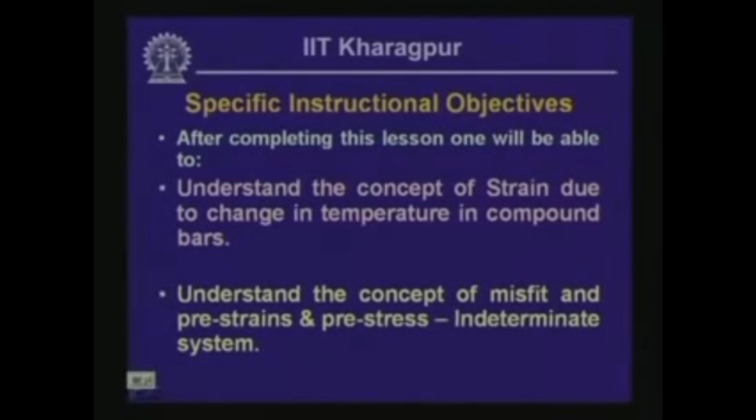We will also look into certain aspects of misfit or lack of fit. Once this lesson is completed, it is expected that one should be able to understand the concept of strain due to change in temperature in compound bars, and also the concept of misfit, occasionally called lack of fit, and pre-strains and thereby pre-stresses, which are basically indeterminate systems, and we will look into these aspects.

The scope of this lesson includes recapitulation of the previous lesson. As we have seen earlier, we generally discuss the questions posed last time, and through that we recapitulate the aspects discussed in the previous lesson: evaluation of strain in compound bars due to variation in temperature, the concept of misfit and pre-strain and thereby pre-stresses, and evaluation of stresses due to change in temperature in different systems and also due to pre-strain in the systems.

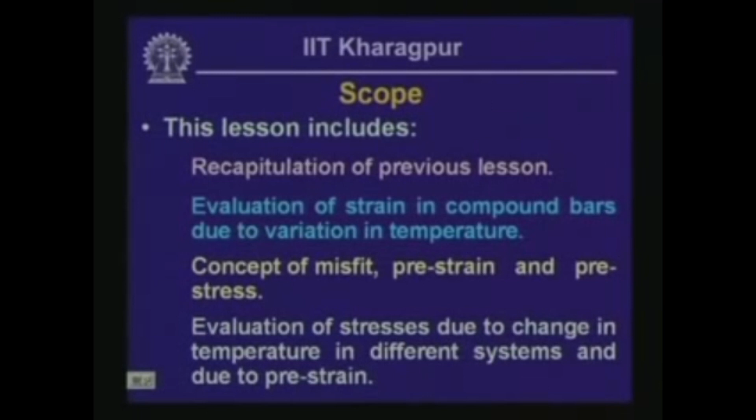Let us look into the answers of the questions posed last time. The first question was: what are the steps for the evaluation of unknown forces for indeterminate systems? If you remember, last time we had differentiated between determinate and indeterminate systems, and we had categorized the steps necessary for evaluating the unknown forces for indeterminate systems.

Let us look into the steps necessary. Number 1 is the equilibrium equation or equilibrium conditions, which can be written down if we draw the free body diagram of the system given. As we have seen when solving several problems, we take the free body of the whole system, and from the free body diagram we can write the equations of equilibrium: summation of horizontal forces equals 0, summation of vertical forces equals 0, and the moment with respect to a point equals 0, giving the equilibrium criteria.

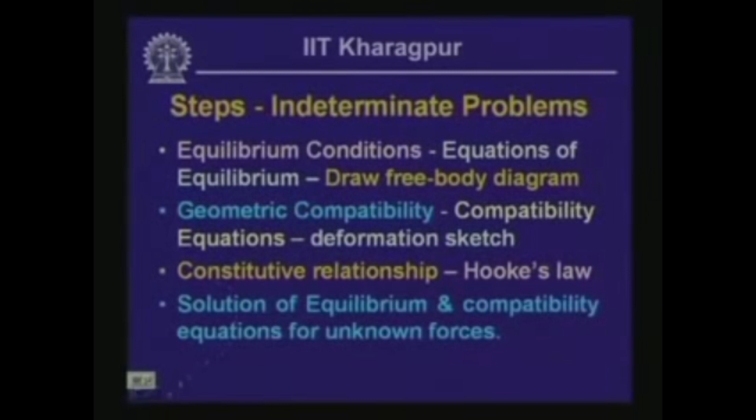So, to evaluate the value of the thermal stress, let us look into the expression which we had derived for the strain. Strain due to variation in temperature, delta T, the final temperature minus the initial temperature, is given as epsilon T equals alpha times delta T.

Now, if the deformation due to temperature is written as delta T, this equals epsilon T times the length of the member L, and epsilon T equals alpha times delta T. So this is alpha times delta T times L. This is the deformation of the member.

Now, when the body is allowed to move freely, it undergoes expansion due to rise in temperature, and we call that expansion delta T. Now, if we do not allow this expansion to happen, we are imposing a restriction, and thereby we are imposing some force into it which will bring back this deformation to its original position. Because of that, this deformation delta T should equal the deformation generated because of the applied force, which equals P times L divided by AE.

So, PL by AE equals alpha times delta T times L. Now, the parameter P by A, force divided by cross sectional area, we can write as stress. So, stress sigma equals E times alpha times delta T times L divided by L, and this L gets cancelled out. So, the stress equals E times alpha times delta T.

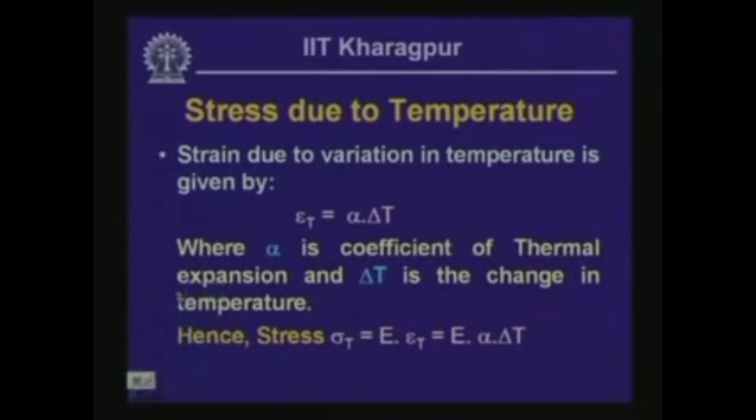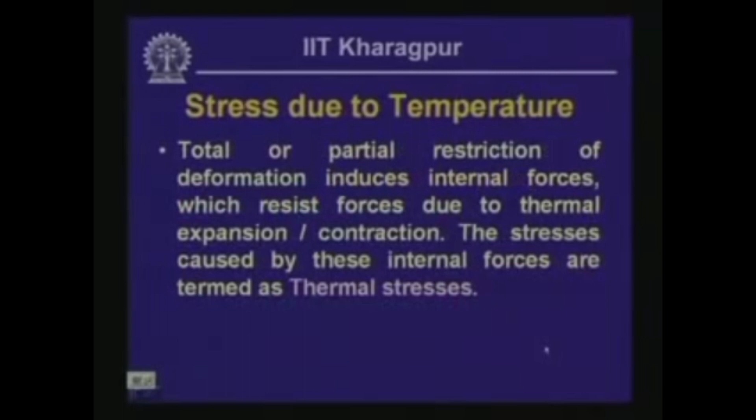Let us look into the last question which we had posed: is the evaluation of thermal stress in a stressed body statically determinate or not? From the discussions going on for the last few sessions, you should be able to answer this question, as we have said that the variation of temperature is basically not possible to solve using equations of equilibrium, and hence they are not statically determinate.

So, forces developed due to temperature changes cannot be determined from equilibrium equations only, and thereby these particular kinds of systems are statically indeterminate. Where there is a change in temperature in the system, when we evaluate the forces, or when we evaluate the thermal stresses due to change in temperature, the system is statically indeterminate, and we need the help of compatibility equations so that we can solve the stresses due to temperature change.

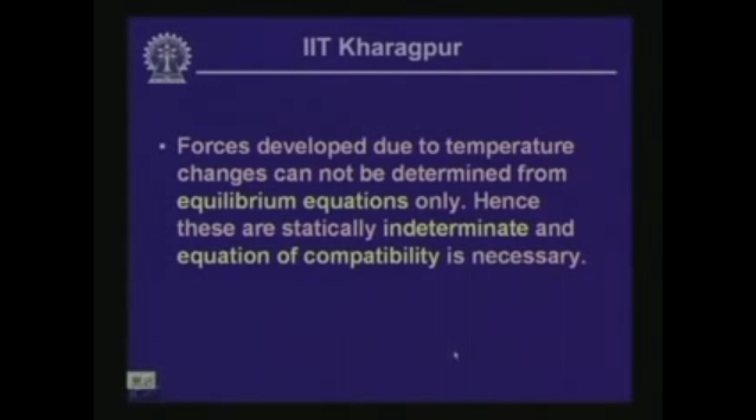Having looked into the questions, let us look into what will be the effect of change in temperature, or the effect of thermal stress in compound bars. Now, compound bars are systems made out of materials of different types, thereby their thermal expansions or contractions are of different magnitudes.

Now, if we look into a system which is quite common, it is like a bolt which is put into a sleeve, and this is the bolt head. Let us say this particular part is the outer sleeve, and this is the bolt which has a threaded part here. This is the bolt head, and this assembly has a washer plate which is provided at the end. So the whole assembly is allowed to undergo a change due to temperature.

Let us say there is a rise in temperature; the whole system undergoes a change in temperature, and let us assume that the thermal expansion for the outer sleeve is larger than the central bolt. So, if we say the coefficient of thermal expansion for the sleeve is alpha s, then alpha s is greater than the coefficient of thermal expansion for the bolt, which is alpha b.

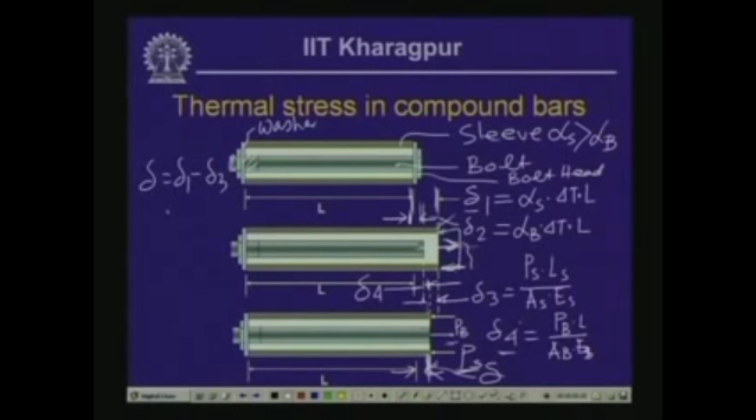From its initial position, it has expanded to delta 2. Now, to bring this to the final position of the combined system, it has to be expanded further by application of this tensile pull PB, which is delta 4. So this equals delta 2 plus delta 4. So the final deformation in the whole assembly of the compound bar equals delta. So the final deformation delta equals delta 1 minus delta 3, or delta 2 plus delta 4.

So we can now write the compatibility equation as delta 1 minus delta 3 equals delta 2 plus delta 4.

Now, in addition to this, we need to have the equation of equilibrium. For this particular system, if you look into the equation of equilibrium, there the forces which are being applied to bring back to its final form, Pb is equal to the force in the sleeve Ps. This is the equation of equilibrium number 2, and this is the equation of compatibility number 1. So we have now two equations.

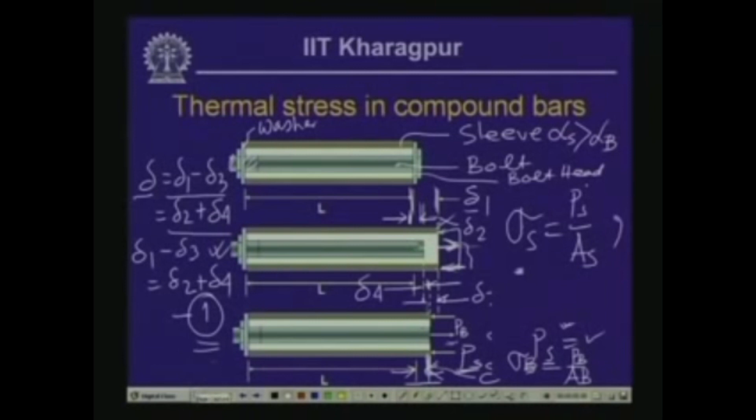Now let us look into another term which we call misfit, or another term which we call pre-strain. Many a times we get structural systems consisting of several members. It may so happen that any of the members of the whole structural assembly are not to the exact length as it should be, either longer or shorter. If that happens, when we try to assemble the whole structural system using these individual members, the length which is shorter or longer causes some problem in the assembly, and this is what is termed as misfit.

It is not fitting appropriately in the system, and that is why this term misfit comes in. Now, if the structural system is a determinate one, let us take an example. Let us say we have one bar which is pinned at this end, and this bar is connected by another bar, connected at this position. Let us assume this is AB and this is CD.

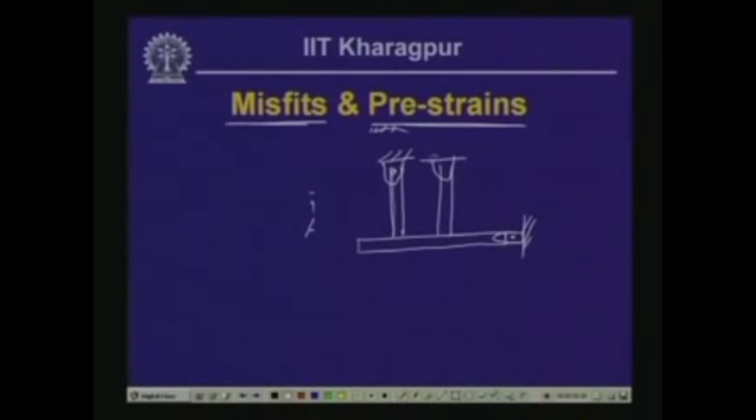Which is connected at this point, and let us say we have two bars connected at this point, and connected at this point. Now, let us say this is A, this is B, this is C, this is D, this is E, this is F. Now let us assume that the length of both bars CD and EF are L.

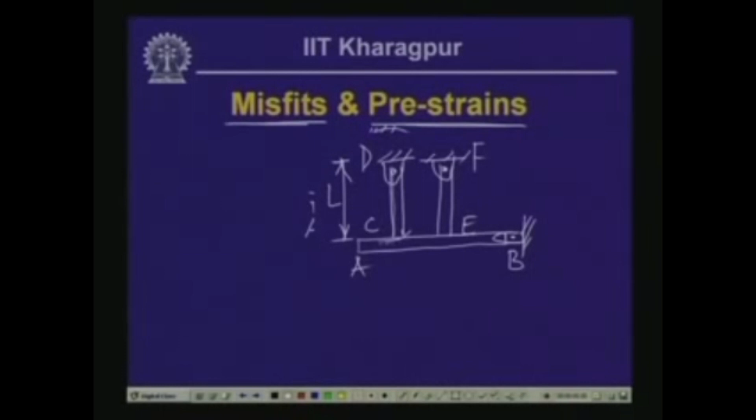Now, if one of these bars, let us say CD, is longer than the length L, then there will be a problem that we cannot fit the member CD into the whole structural assembly. As a result, if we would like to fit in that longer bar, what we need to do is stretch this whole assembly, fit in the bar CD in its position, and release this force. As a result, the whole assembly, the bar EF and bar AB, will be subjected to some amount of strain, and there will be stresses induced in the bar.

So if the system is indeterminate, and if we have the length of the member not exactly as we desire, there is a possibility that the structural system will be subjected to some amount of strain. These strains or stresses are pre-introduced in the system before the system is loaded or any loads are applied, and this is what we call pre-strains or pre-stressing. Many times we introduce this kind of pre-straining or pre-stressing intentionally to avoid some problems in certain situations, which we will look into at a later stage.

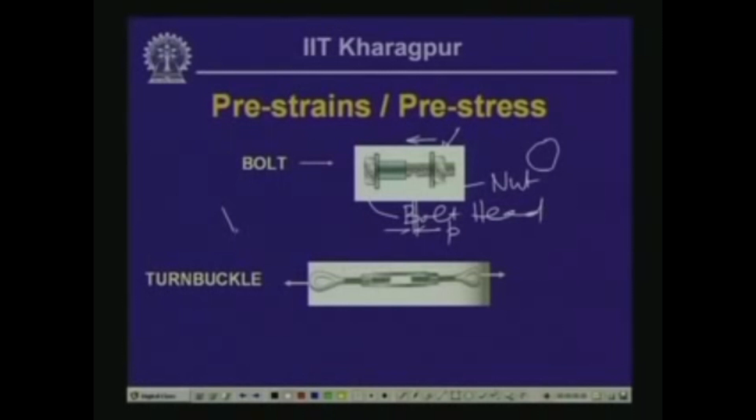Now, when this nut is rotated, if we start from one point and rotate it one complete round, the nut moves forward. This movement is over a length in the threaded part, which we commonly term as pitch. So if we look at that threaded part in this form, when the nut is rotated along the threaded part, it moves ahead, and when it moves from one point to the other by giving a complete 360-degree rotation, it moves ahead over these two peaks, which we designate as the value P, which we call pitch.

So if there are n number of turns, if we turn the nut by n, then the total movement of the nut, if we call that delta, is going to be equal to n times the pitch P.

Another system which is often used is known as the turnbuckle. In the turnbuckle, threaded parts are introduced on either side, and once this system is rotated, both threaded parts move. Once the central part of the turnbuckle is rotated, since we have threads on either side, both sides move forward or backward by one pitch. So if we have one complete turn of the turnbuckle, we have two movements, which equals 2 times P.

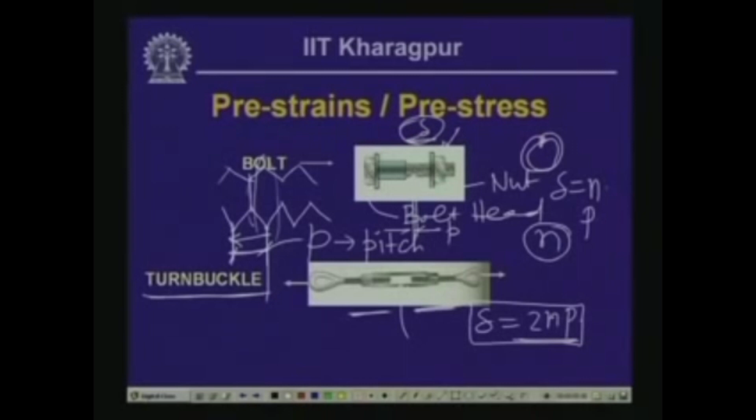Now, this misfit, or many a time, some deformation are introduced in the system by using the turnbuckle, and we introduce some amount of pre-straining or pre-stressing in the member. If we have this kind of pre-straining in the system, then the evaluation of the effect of such pre-straining, or the evaluation of the stresses, are exactly the same as that of the effect due to temperature change. So the way we have analyzed a system for thermal stresses due to change in temperature, we carry out exactly similar steps to evaluate the effect of such pre-straining system. In other words, we write down the equations of compatibility and equation of equilibrium, and then we relate the strain to the stresses through constitutive relationship, and we evaluate the unknown forces and thereby the stresses that is introduced in the assembly.

Now let us look into that. If we introduce this kind of pre-straining, then how do we get the stresses in the system? Let us say we have an assembly where we have a central shaft which is made out of copper, and we have two steel wires on two sides where two turnbuckles are introduced. So this is the turnbuckle, and this is also the turnbuckle.

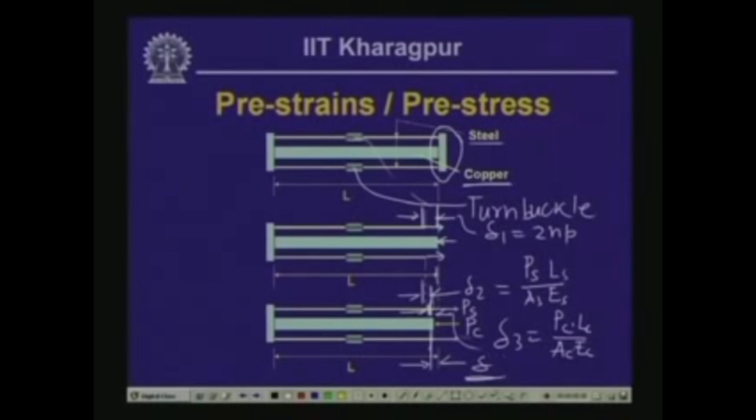Now, the compressive force which is being applied into the copper bar, if we call that as Pc, so the deformation which is from this position to this position, which we call as delta 3, this delta 3 is equals to Pc times L by Ac times Ec, or Lc and Ls, let us call it. So then the final form is, which is from original length to this particular length, which is equals to delta, and this delta is nothing but equals to, delta 3 is equals to delta 1 minus delta 2. So we can write the condition that delta 1 minus delta 2 is equals to delta 3.

So this is the compatibility criteria which is occurring because of the application of the pre-straining in the system. Also the equilibrium equations, if we look into that, we have two steel wires which are being pulled by a force Ps, and we have the central copper bar which is being compressed using the force Pc. So in equilibrium situation, Pc should be equals to twice Ps.

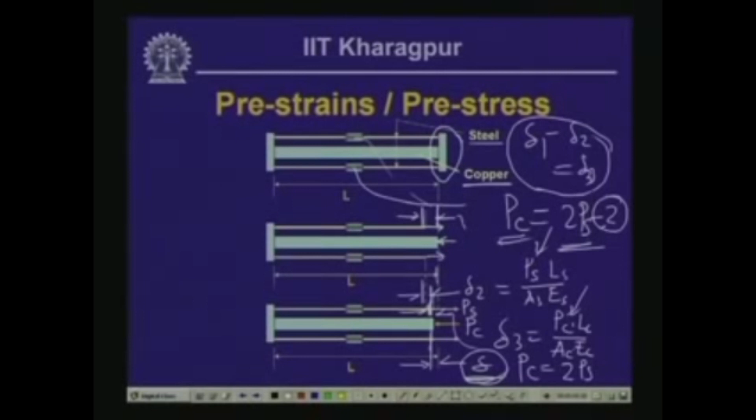So we have the equation of compatibility, which is delta 1 minus delta 2 equals to delta 3, which can be written in terms of Ps and Pc, and we have the equilibrium equation which is Pc is equals to twice Ps, which we can call it as equation of equilibrium, and these two equations in combination will give us the values of Pc and Ps. Once we know the value of Pc and Ps, we can compute the stresses in the copper bar and the steel wire, and thereby we can compute the final deformation that will be occurring in the whole assembly. So similar to the one as we have done in case of evaluation of thermal stresses, we can evaluate the stress and the deformation in an assembly where we introduce pre-straining or pre-stressing in the system.

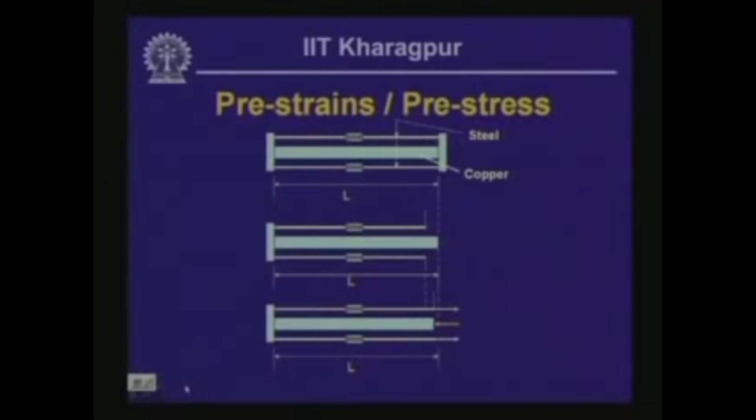Well, after looking into these aspects, let us look into some examples related to these areas. Now, in the last lesson, I had solved one problem which is like this: we have a rigid block of mass m supported by 3 rods, 2 copper rods and 1 central steel rod, and of course we had evaluated the stresses. It was asked to evaluate the largest value of m.

Which we had evaluated from the criteria that the deformation of the copper bar equals the deformation of the steel bar, that is delta C equals delta S, the final deformation in the system. And of course the criteria of equation of equilibrium, that the mass is being supported by 3 bars. So we had written the equation of equilibrium and the equation of compatibility, and the compatibility criteria comes from delta C equals delta S, since finally they will be at the same length, or it will be a level surface.

Well, we had solved that, we had evaluated the value of m. Now, subsequently, it is told that you need to determine the length of the 2 copper rods, if it is different from 160, so that the stresses in all 3 reach their allowable limits simultaneously.

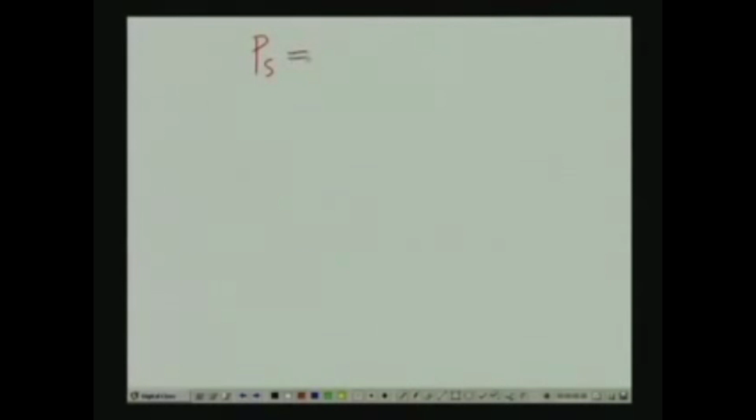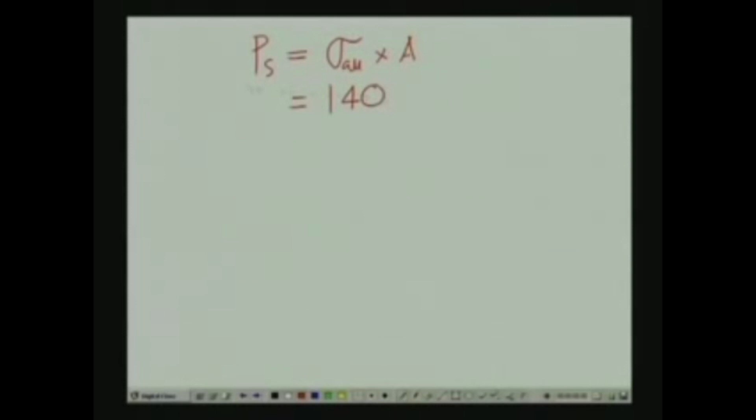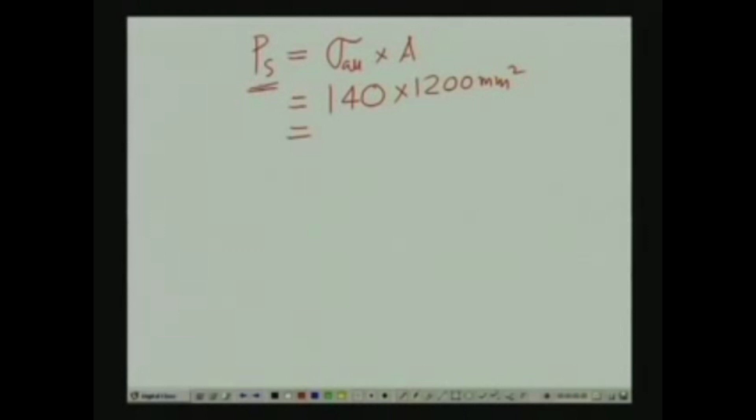If we go into the full limiting stress, then what will be the value of the forces that they can undergo? Now, the load that can be carried by the steel bar equals sigma allowable multiplied by the cross sectional area A. Since the limiting stress is 140 MPa for the steel bar and the cross sectional area is 1200 millimeter square, the maximum load carried by the steel bar equals 168 kilonewton.

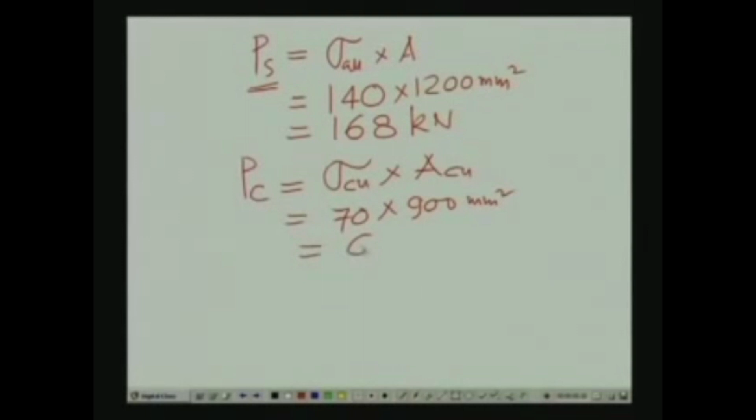Similarly, the maximum load that can be carried by the copper bar equals the allowable stress in copper multiplied by the cross sectional area of the copper rod, which is 70 MPa multiplied by 900, the cross sectional area, so this equals 63 kilonewton. So these are the values that the 3 rods, the copper rods and the steel rod, can carry.

So if we go up to the limiting value of those 2 rods, we can compute, still considering that the deformation of these members will be the same. From that criteria, we can find out what length we need to achieve full utilization of the 2 bars. So from the compatibility criteria, the deformation in the copper rods equals the deformation in the steel rod, which gives us

PC times LC divided by AC times EC equals PL by AE, where A is the cross sectional area of the copper rod, E is the modulus of elasticity. This equals P steel times L steel divided by the cross sectional area of the steel rod times E of steel, and this equals...

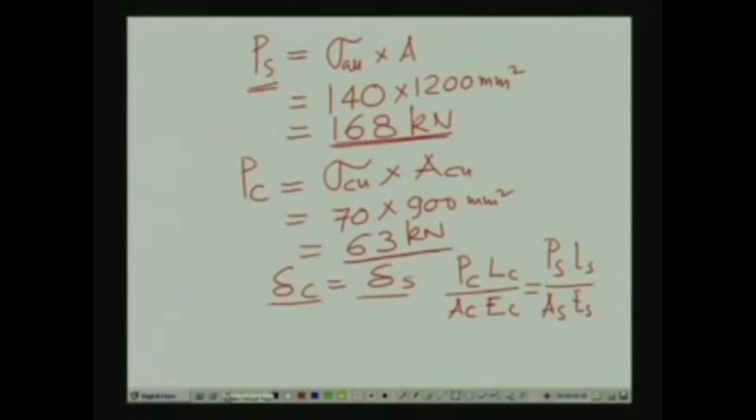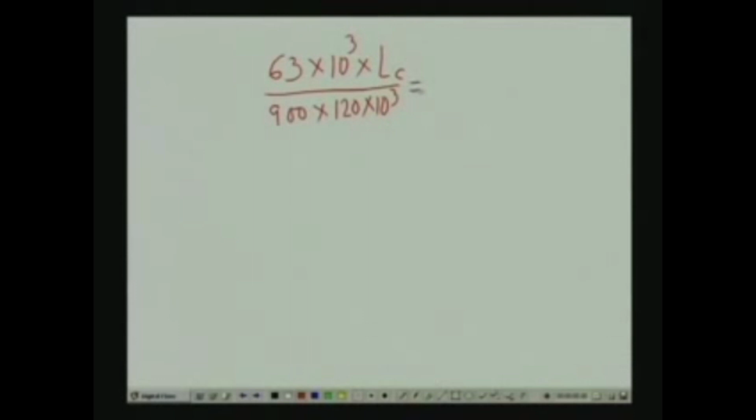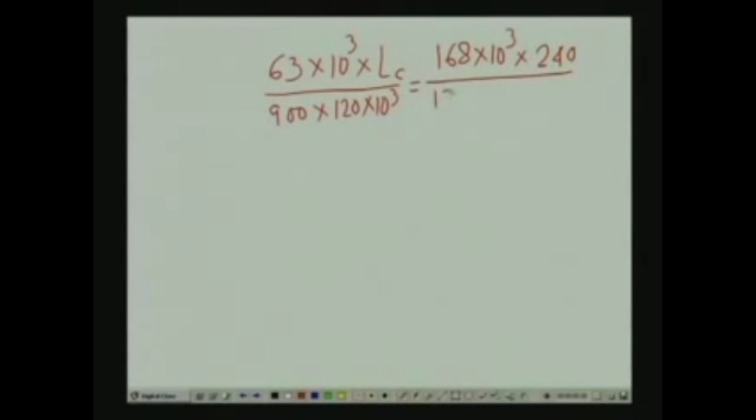If we compute this, it comes as 63 into 10 to the power 3 Newton times LC, which is what we need to determine, times A is 900, times 120 gigapascal times 10 to the power 3 megapascal. This equals 168 into 10 to the power 3 times the length of the steel bar, which remains unaltered at 240, divided by 1200 into 200 gigapascal, which is 200 into 10 to the power 3.

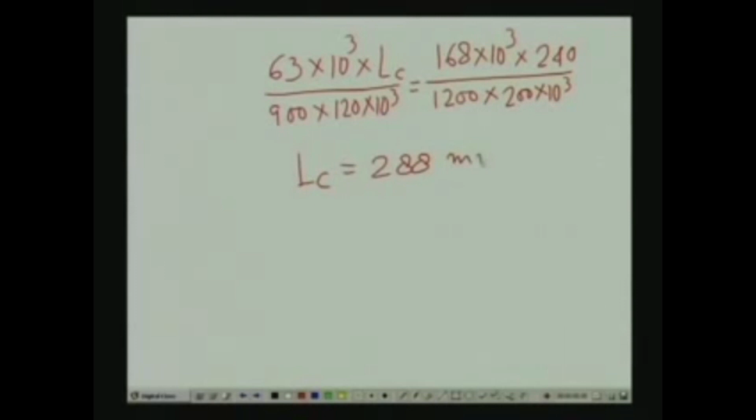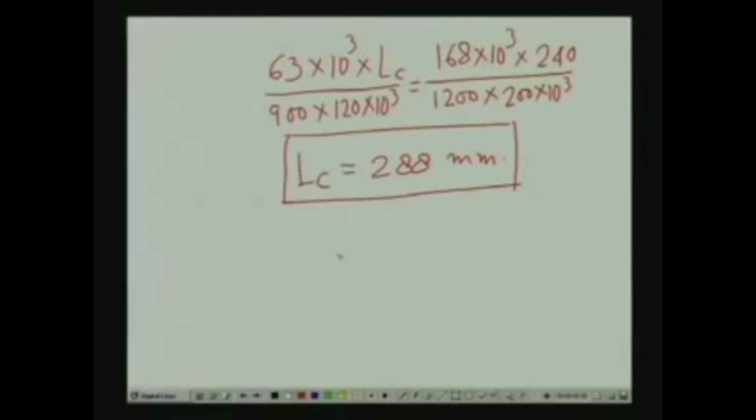So this gives us the value of LC, the length of the copper rod, should equal 288 millimeter. So if the length of the copper rod is changed from 160 millimeter to 288 millimeter, then all three rods, the two copper rods and the steel rod, will simultaneously reach their limiting stresses of 140 MPa and 70 MPa. So for that, we will have to make the length of the copper rods 288 millimeter.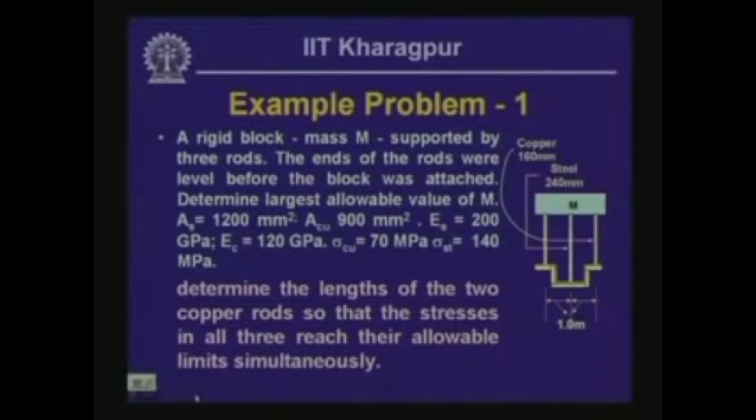This system is not subjected to any forces as such, but is undergoing change in temperature, and the supports are unyielding, so they do not have any effect because of the change in temperature. As we have done before, we need to compute the equations of equilibrium, write down the equation of compatibility, and then write down the constitutive relationship between stress and strain, so that we can evaluate the unknown forces, as the stresses induced because of the change in temperature is indeterminate.

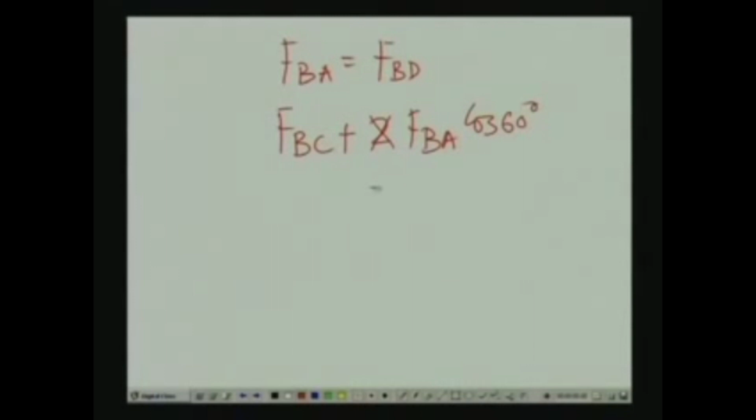If we take the summation of horizontal forces equal to 0, it gives us FBA is equal to FBD. And summation of vertical forces equal to 0 gives us FBC plus FBA cos 60 plus FBD cos 60 is equal to 0. So if we look into the equilibrium equation, it gives us FBA is equal to FBD, and FBC plus twice of FBA cos 60 plus FBD cos 60, this is equal to 0.

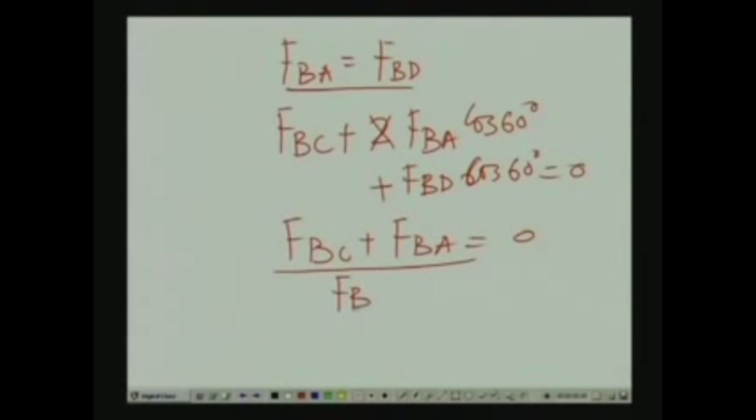Since BA and BD are the same, this is twice of FBA, and cos 60 is half. So FBC plus FBA is equal to 0. Thereby FBC is equal to minus FBA.

Now, this says that if because of the change in temperature the central member is undergoing extension, or there is a tensile force in the bar FBC, then FBA and FBD will be subjected to compressive forces. So the whole structural system having 3 bars will undergo expansion because of the temperature, which is equal to alpha delta T times L, the deformation because of temperature. And because of the forces that are getting generated, since they are constrained and not free to move, they will have tensile and compressive forces for which there will be deformation, and if we equate that we will get the equation of compatibility.

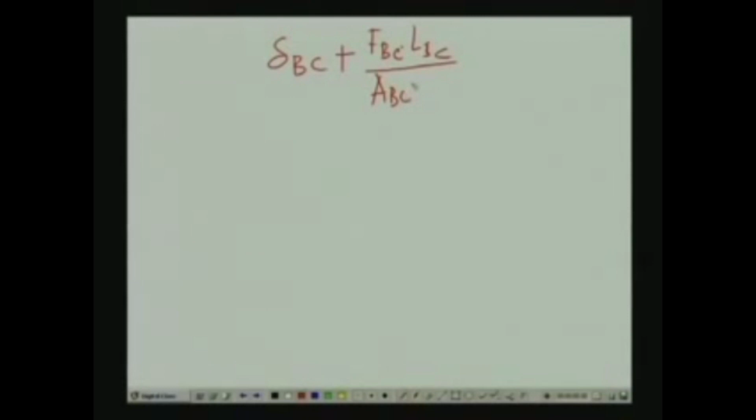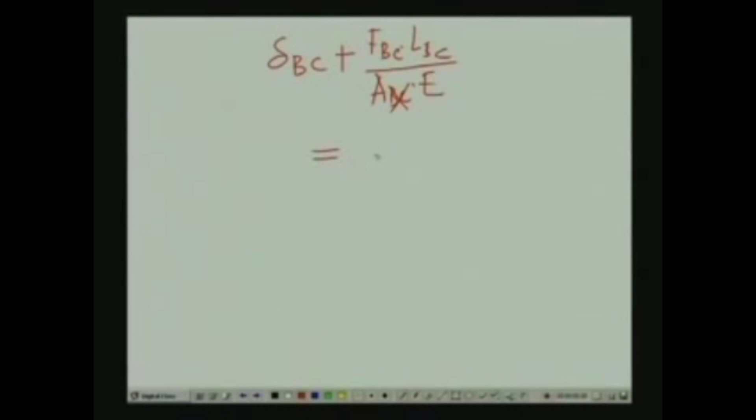So the equation of compatibility, if we say the expansion of the central bar as delta BC, plus the force in bar BC times L BC divided by A, the cross sectional area of bar BC, times E—since A and E are the same we write as AE—that is the deformation of the bar, which should be equal to the deformation of the bar. This is for the bar BC.

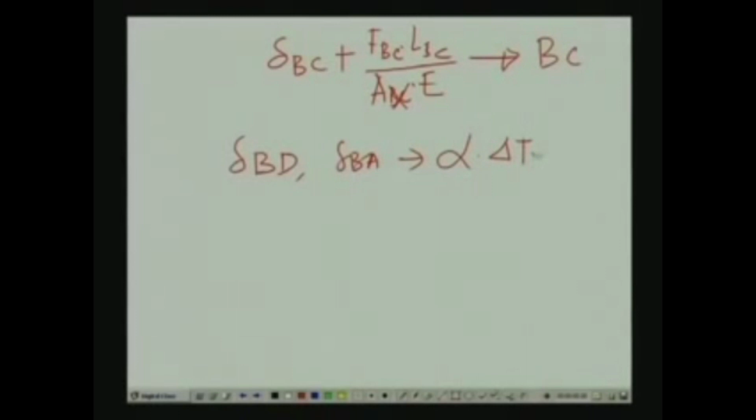Now for bar BD or BA, we have the deformation equal to delta BD or delta BA, which is again due to temperature, alpha times delta T times L, and for the compressive force we will have FBD or FBA times L BD by AE.

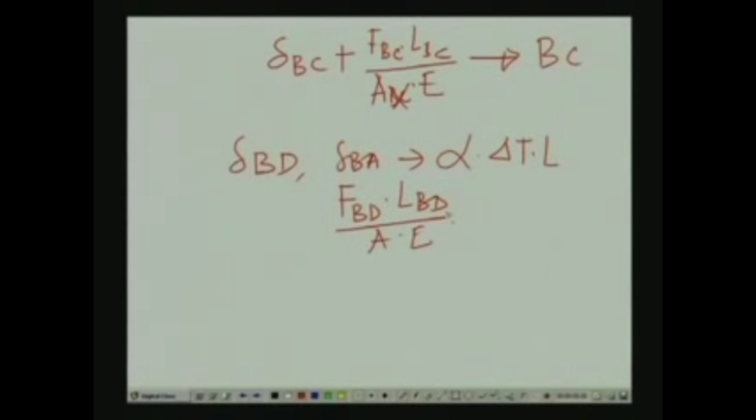Now if we look into the deformation configuration of joint B, if we exaggerate that, let us say this is the original position of B, which undergoes deformation and comes to this particular point.

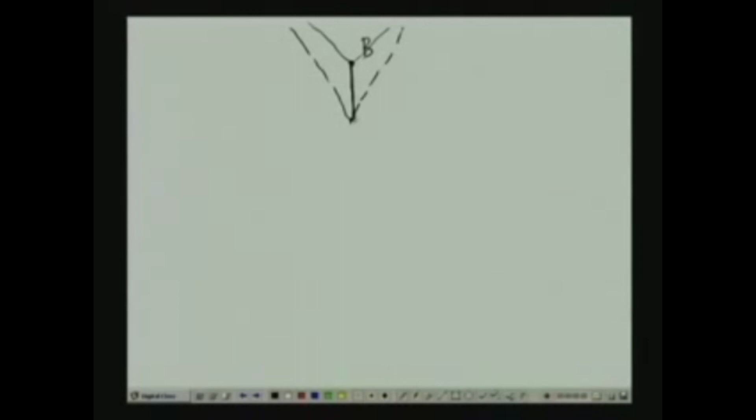Now, from here, this was the original direction of the members, and this is the deformed direction of the members, which are BD and BA. This is the deformation being caused by member BC, which we call delta BC. If we drop a perpendicular here, this is the length of the inclined member. Basically it should move in an arc which is circular.

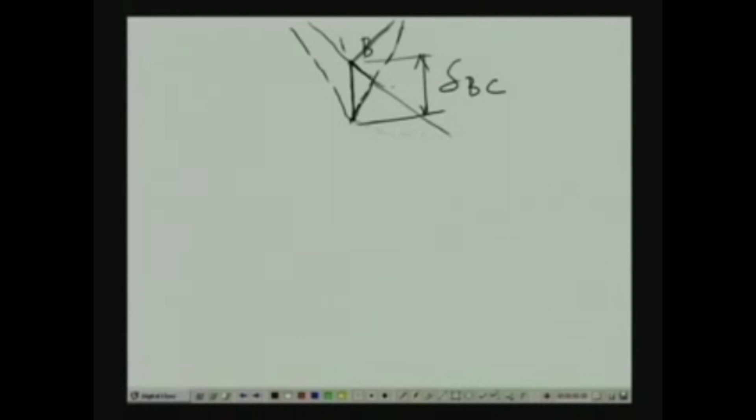Since the deformation is small, we take this as a straight one. If we drop a perpendicular here, this is the deformation undergoing in the inclined member. Let's call this deformation delta BD. Now this angle is 60 degrees in its original form. Since the deformation is small, we still call this angle 60 degrees.

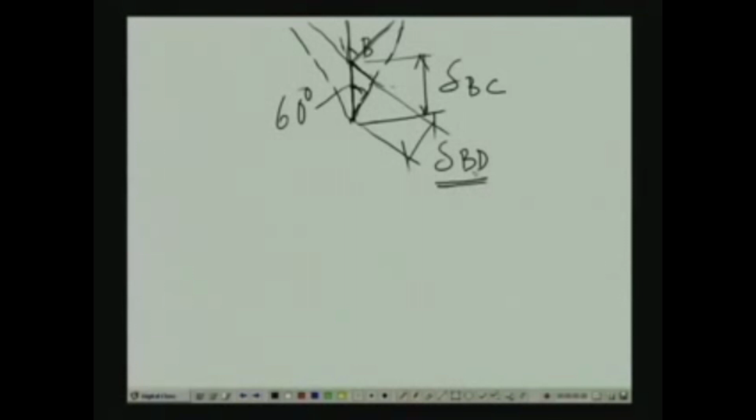Hence, delta BC cosine 60 equals delta BD. So we can write delta BC cosine 60 degrees equals delta BD.

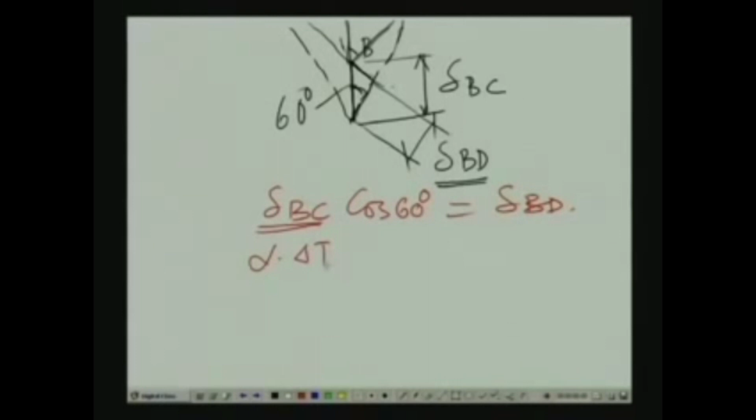The deformation we have obtained in the member is alpha times delta T times length, which is 1.5 meters for this, plus the force in the member BC times length of member BC divided by AE.

This equals cos 60 is half, so twice of this, 2 times, then we have alpha delta T times length of member BC minus the force in member BD times length BD, so force into BD times length into BD by AE.

Now, since we know the relationship between FBC and FBD, the only unknown is the force FBC, and all other parameters are known. So we can compute the value of FBC and from that calculate the stress.

Once we know the value of FBC, the forces in members FBC, FBD and FBA are known, and force divided by cross sectional area gives stress. Since the cross sectional area is the same, that will give us the stresses in the member.

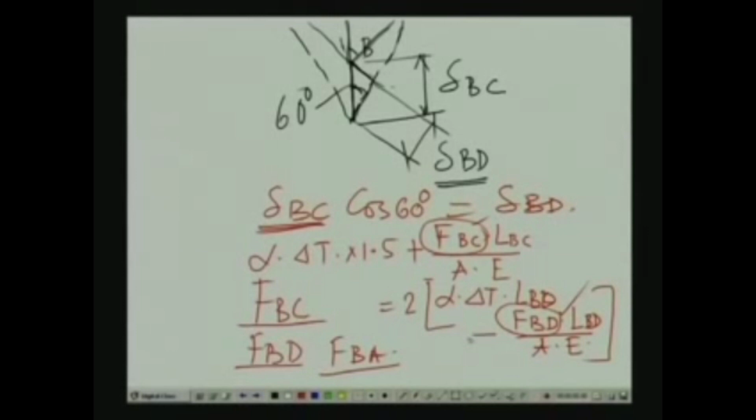We have another example set for you: a compound bar with 3 materials, bronze, aluminum and steel, of length 800 millimeter, 500 millimeter and 400 millimeter, combined together and put within two fixed walls. Initially they are stress free. We need to find the stress in each material, in each part of this compound bar made of bronze, aluminum and steel, when the temperature drops by 30 degrees centigrade.

So initially, from some temperature it drops by 30 degrees centigrade. Considering that these walls do not deform, we need to find out how much stress this bar undergoes because of the drop in temperature.

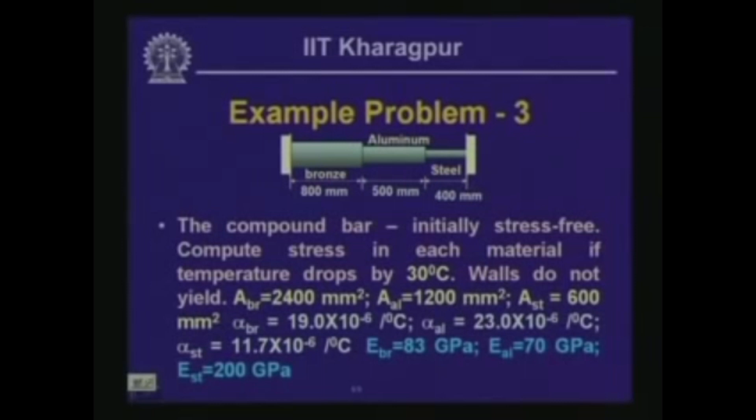We have another problem: what stresses will be produced in the steel bolt and copper tube if we allow a quarter turn of the bolt. Pitch of the bolt is given as 3 millimeter, and area of cross section is 600 millimeter square, and with these parameters you need to compute the value of this stress.

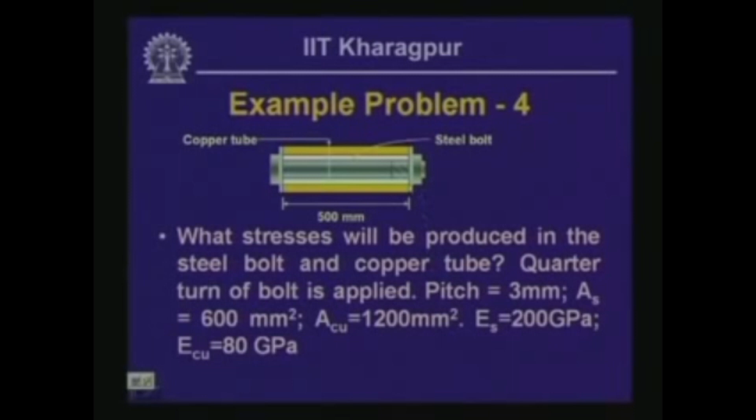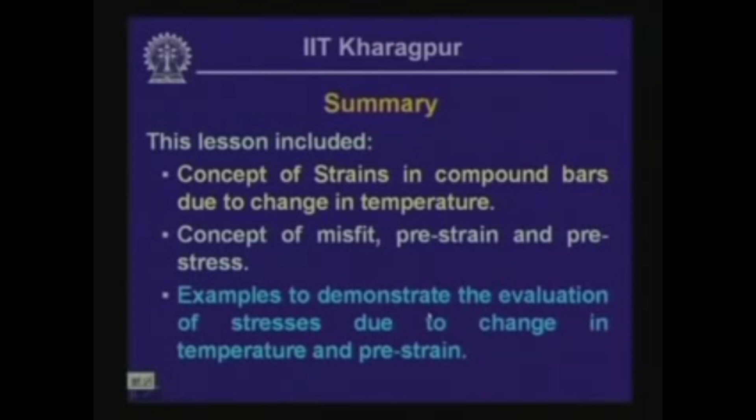In summary, we have discussed the concept of strain in compound bars due to change in temperature. We have seen the concept of misfit, pre-strain and pre-stresses, and some examples to demonstrate the evaluation of stresses due to change in temperature and pre-straining.

Now some questions are set for you. What is meant by misfit and what are its consequences? What is the principle of double acting turnbuckle, and what is the pitch of a bolt and how is it related to the displacement of the nut? We will discuss these questions next time. Thank you.